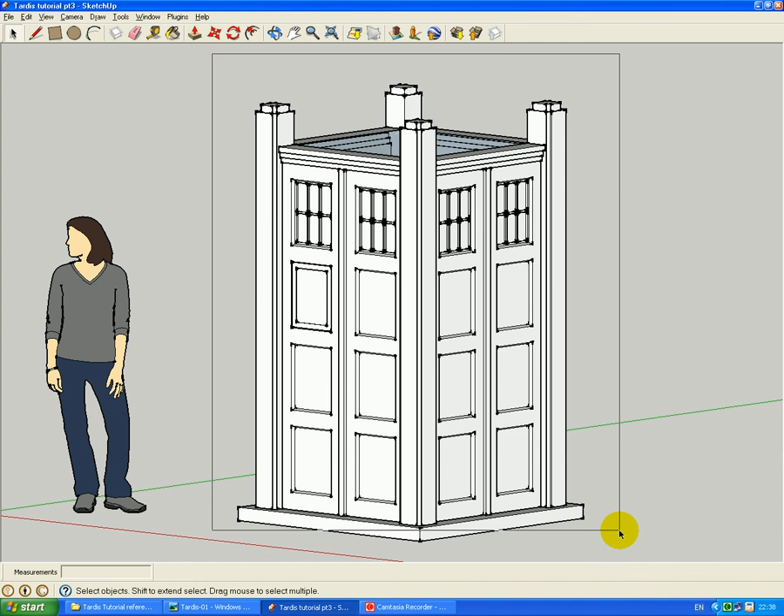So first of all, we're going to start out by hiding the columns and the side panels, because we're going to be using the base as a reference for centering our police public call box signs and the actual roof. So if we select all those, leaving the base unselected, and go to hide, that's hidden all those.

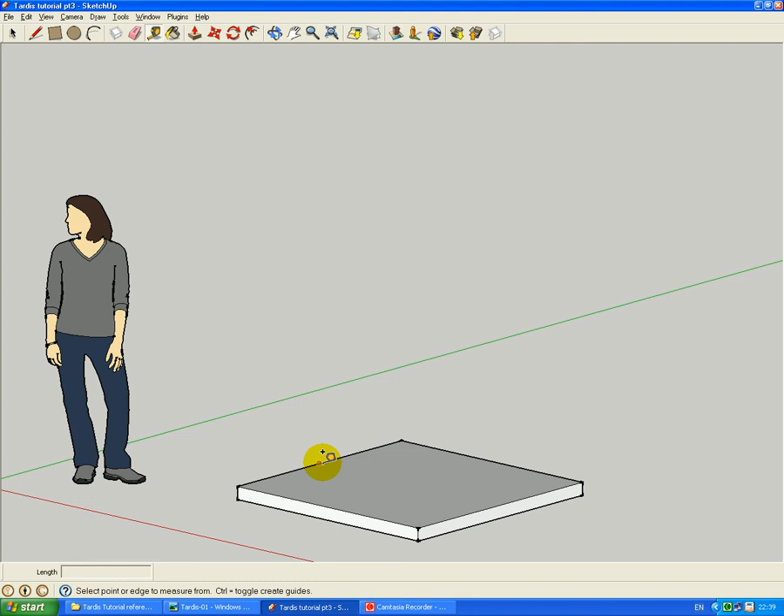If we angle this to get a better view, we're going to start by creating some guides. We'll start by making some guides that match the center. So if you reference this, that's the midpoint there, I believe. Yep, and that's where the guide wants to be, and the same for this guide here. Again, midpoint, there we go.

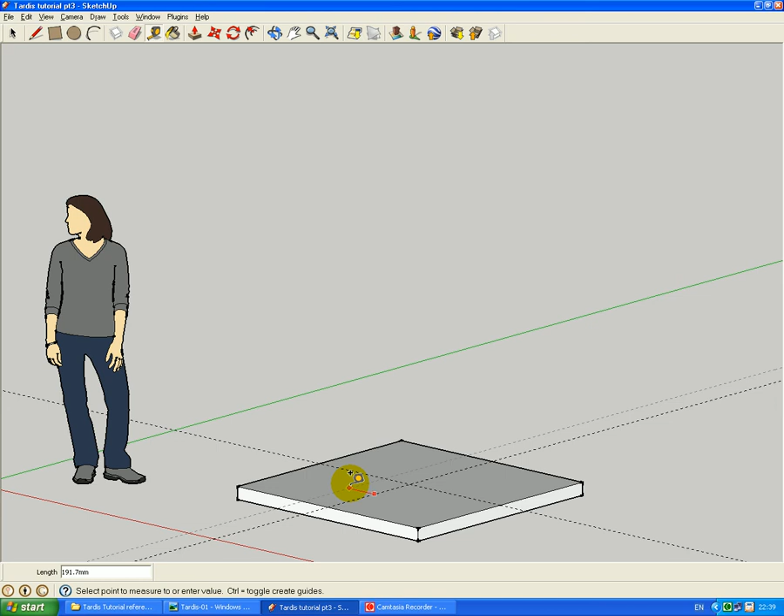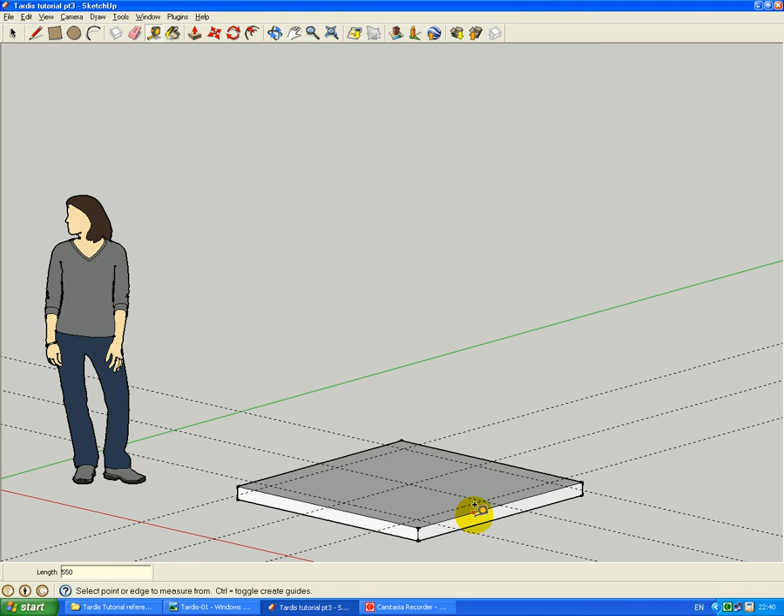The width of the actual police box, public call box signs is 1100, so we'll make some guides. 550 this way, 550 this way, 550 this way, and 550 that way. The actual width of the police public call box signs is approximately the same width as the base, so we'll create the cross section which will include the police sign and the roof shapes.

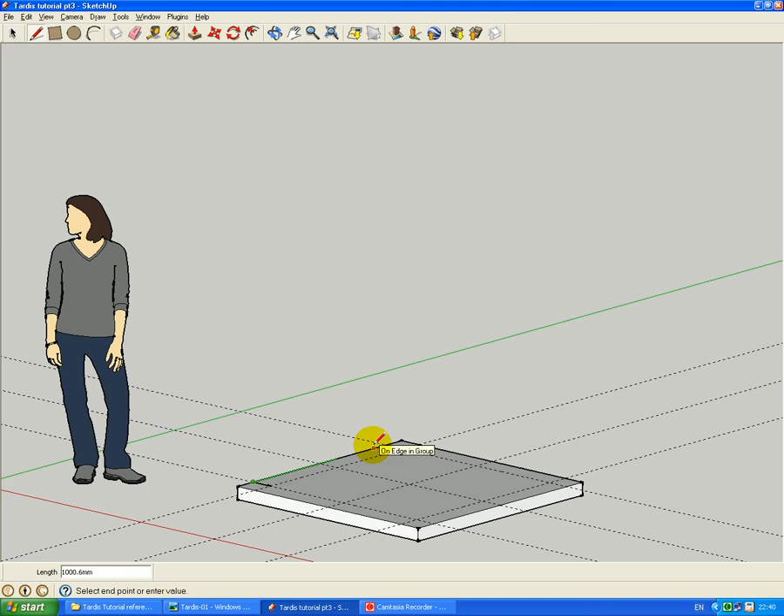So start by getting the pencil tool, start at any one of these intersections, draw from here to there, from there to there, there to here, there to there, there to there, to here, to here, to here, to here, to here, to here, and then finally join the two lines together, and that's created a cross section of our police public call box sign and roof area.

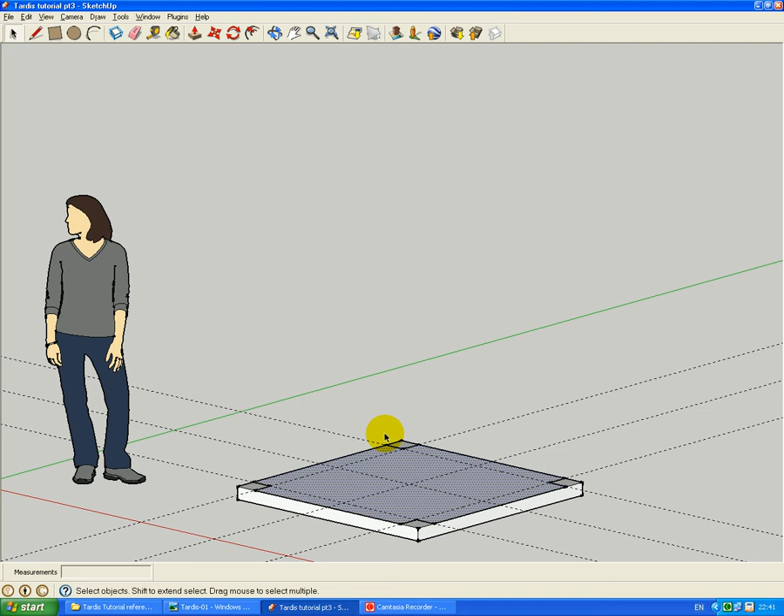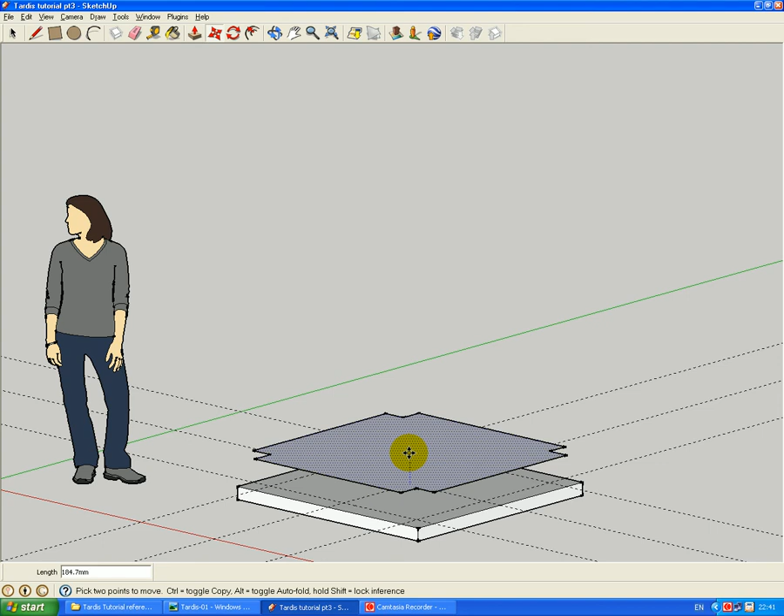We now need to lift this up into position, so if we select the move tool, we can sort of start the move from the center and start to pull it upwards. You can see there is a blue line forming just below the cross, where I'm moving it from. That means it's moving directly vertical, and we need to move it up to the same height as the side panels were, which was 2070. And this is where our police public call box signs and our roof will start.

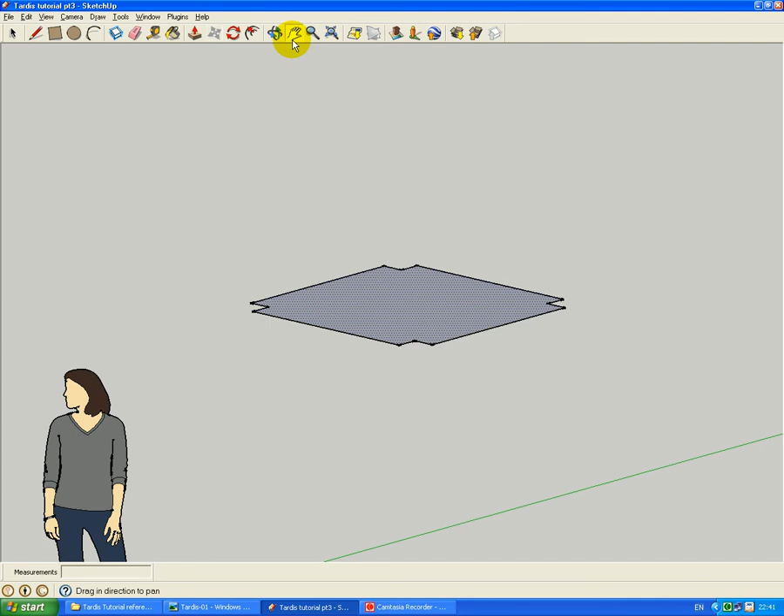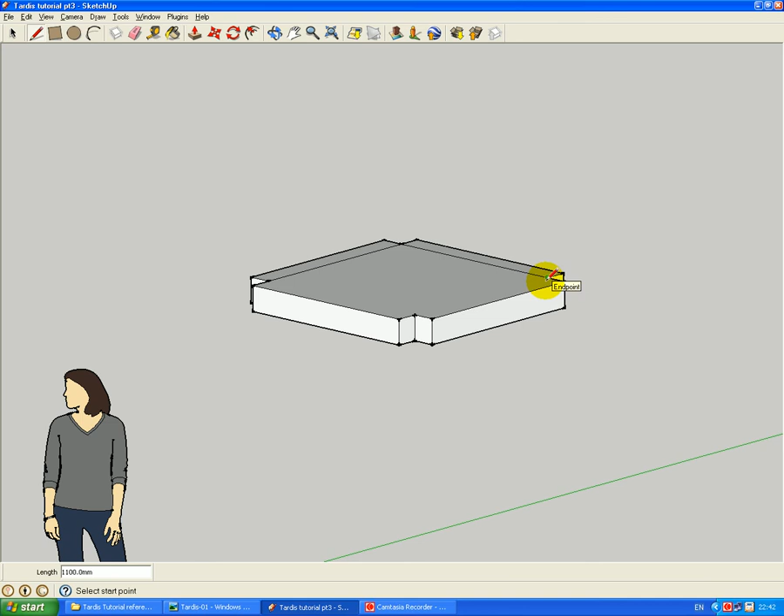We've finished with the guides now, so we may as well delete the guides and pan down so we can get at the roof section. First of all, we need to pull up this cross section to the height of the door sign, which is 152. We then need to put some additional detail in for the actual roof section. So if we draw a line from this corner to here, and from this corner to here, from this corner to here, and from this corner to here.

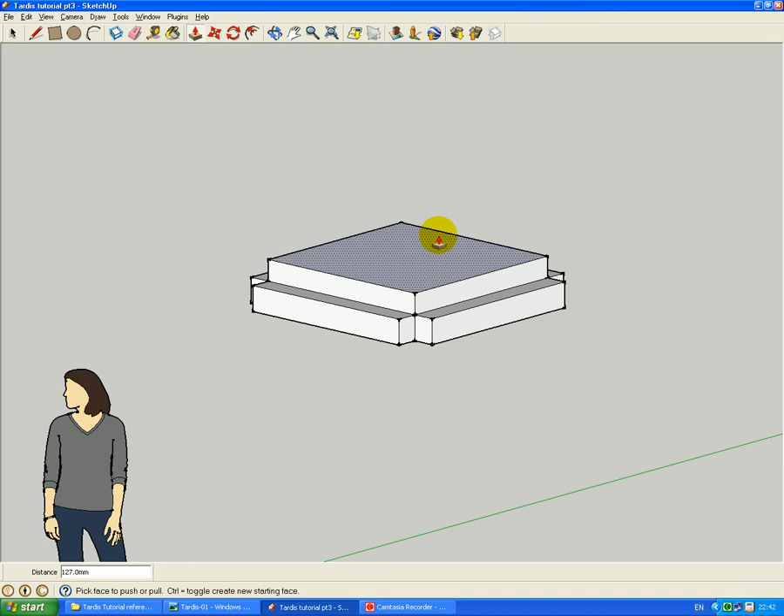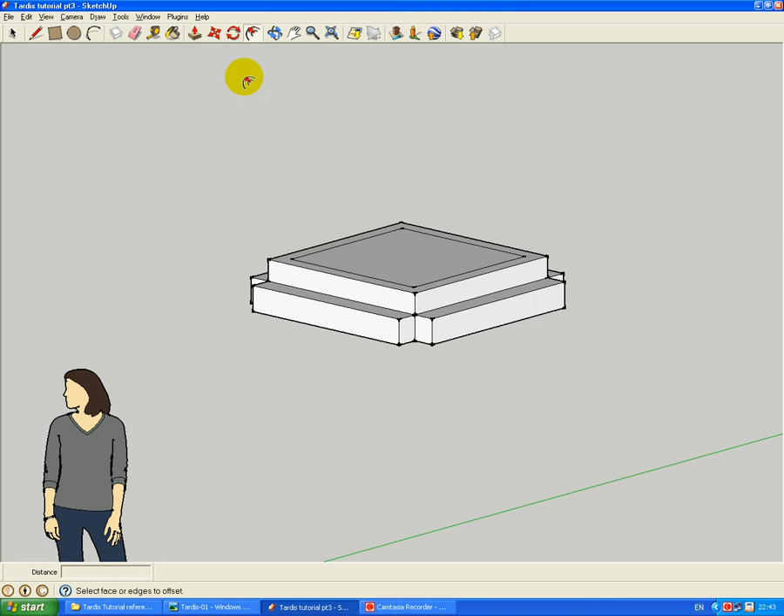We now need to pull up this section, 127. And we're now going to make the next step in for the roof, which is 1010 to 920, that's 90. We need to make it offset, and offset it in by 90. Which, if a quick measure, should make it 920, which is correct. Okay. Now I need to pull this section up 64.

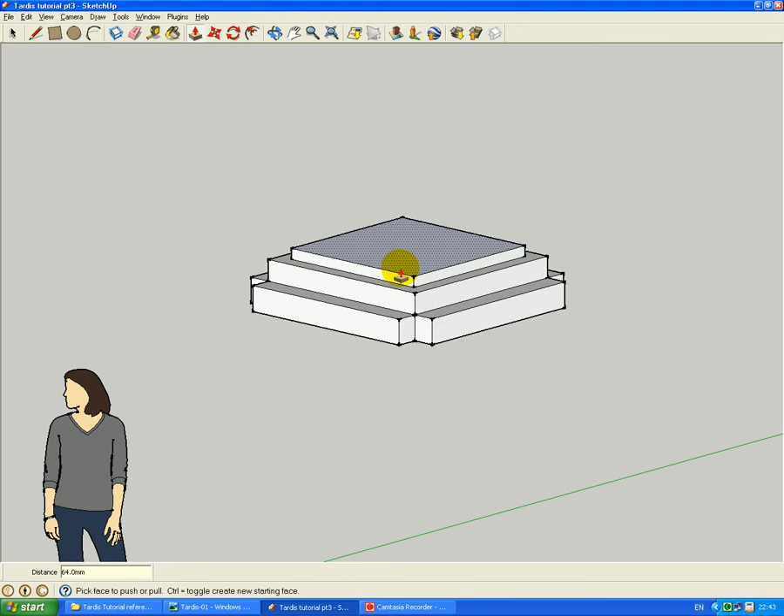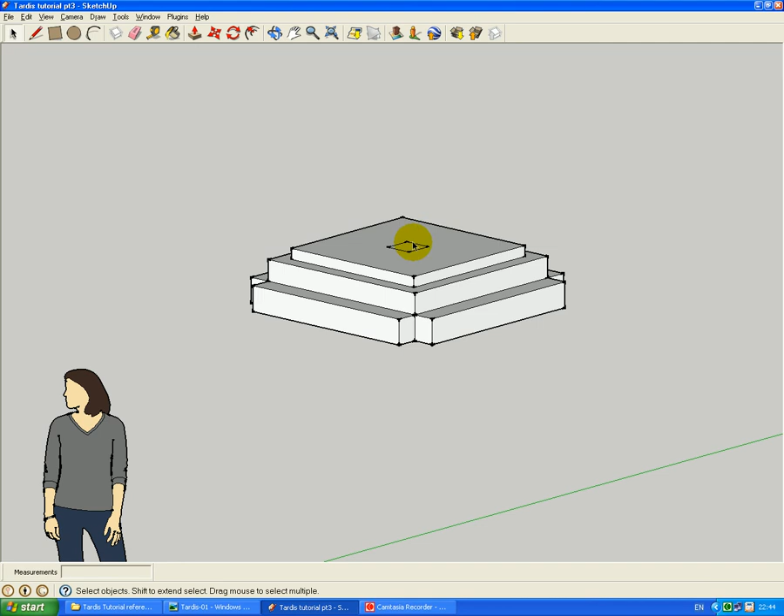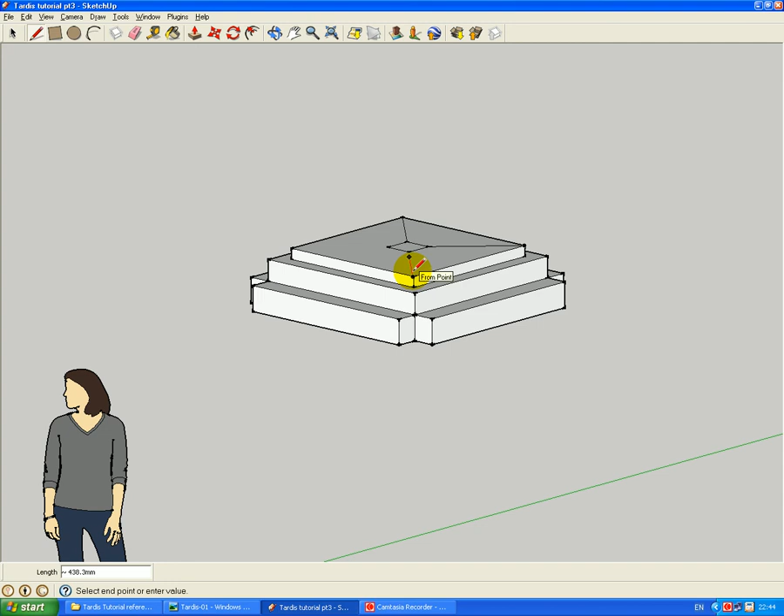I now need to make an offset on the inside, which is going to be 380. This shape here is going to be our centerpiece where the lamp sits on at the top, but first of all we need to pull the roof up to it to make its angled roof. We can't do that at the moment because we haven't got these edges that go from the corner of here to the corner there. So we get the pen tool and draw from here to here, from there to there, I've missed that point there, from here to here, and from there to there.

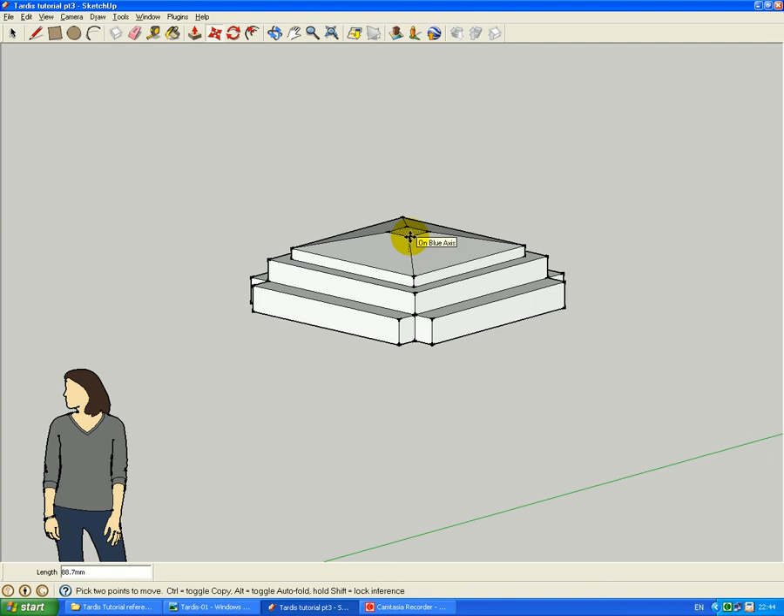Select this middle square, get to the move tool, start to move it up vertically, and we want to move it up 64. Just to make sure that it hasn't wandered off centre, let's just angle the roof round a little bit. As you can see, it's still perfectly central, that's fine. We now need to use the push-pull tool to pull up the centre, and again that needs to be pulled up 64. And that gives us our basic roof shape.

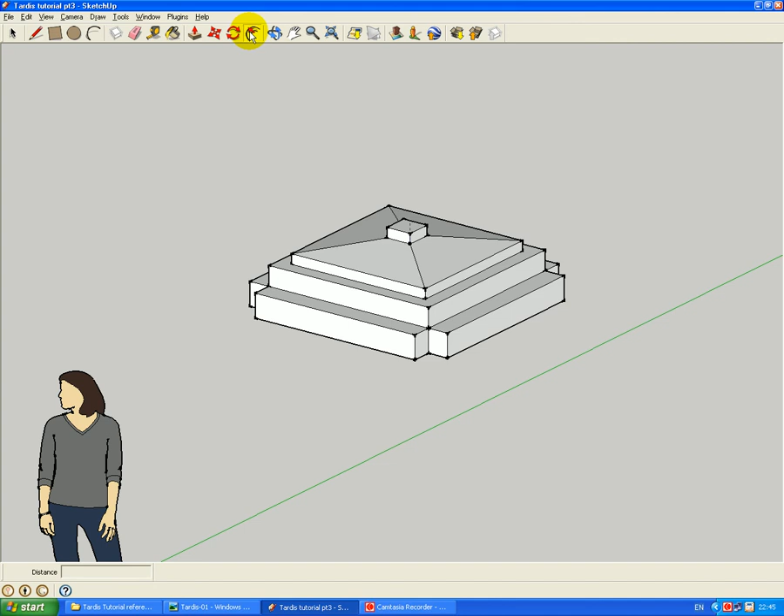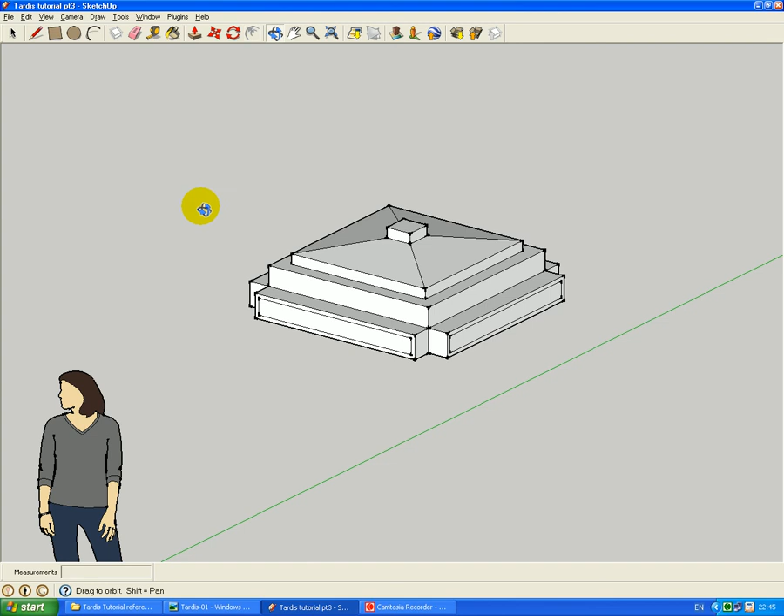We now need to make the recesses where the police public call box sign goes. So again we choose the offset tool and offset it by 25. And the same on this side, 25. Rotate it around and offset on this side as well, 25, and same here, 25.

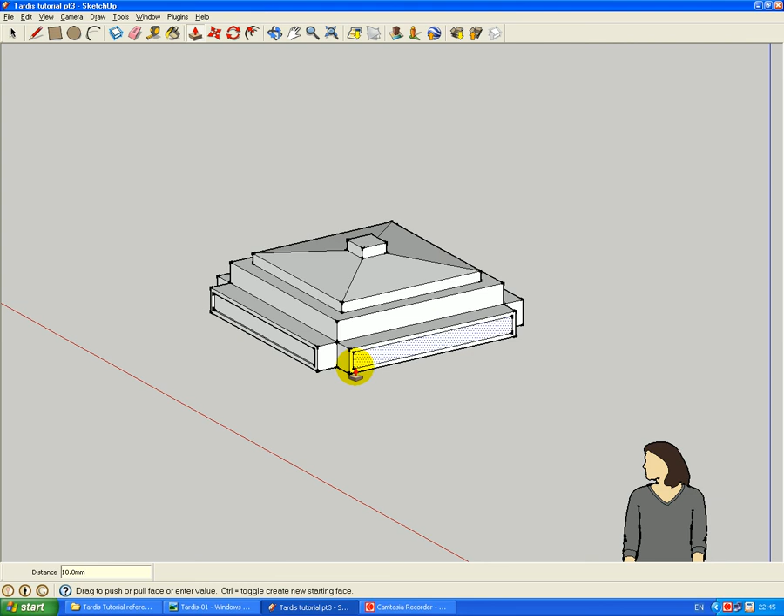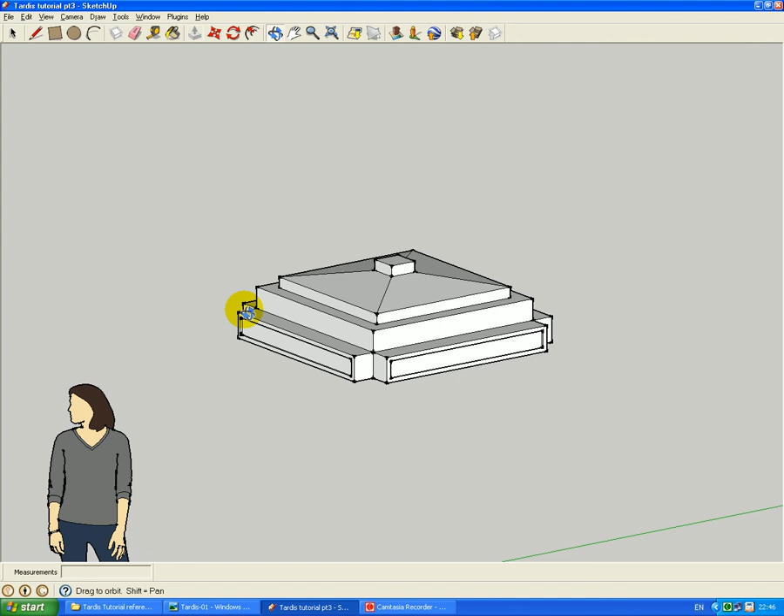Now to take our push-pull tool to make the recesses for the signs. So if you start to push-pull that in, push it in 10, push this in 10, rotate it around to get to the other two sides, and go to the push-pull tool again, push it in 10, and push it in 10. That's our basic roof shape and sign shape.

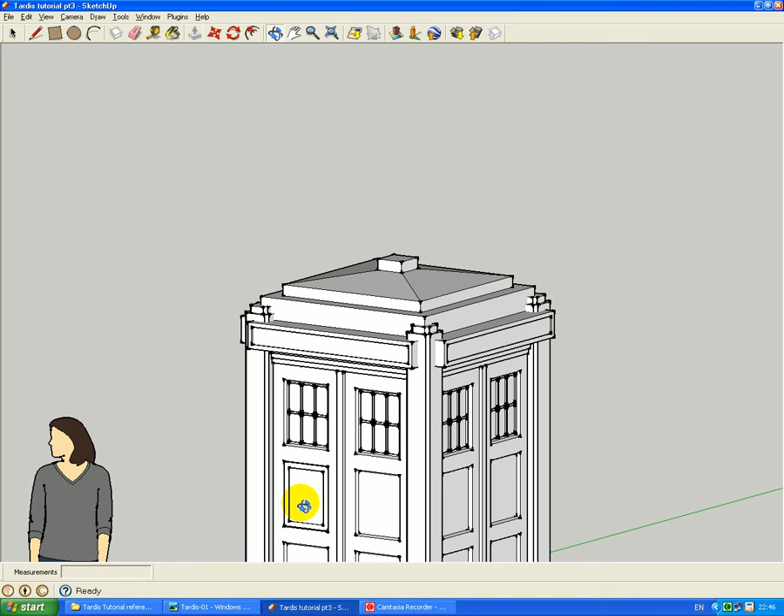If we now go and unhide the rest of the Tardis that we've previously hidden, edit, unhide all, we can see our Tardis is now coming together quite nicely. We've got the roof, the door sign, the police public call box signs, the telephone door sign, etc., and all the windows. If we just zoom out a little bit, pan up a bit, zoom in a little bit, pan it over, we can see using this sort of figure here, it is looking about the right size.

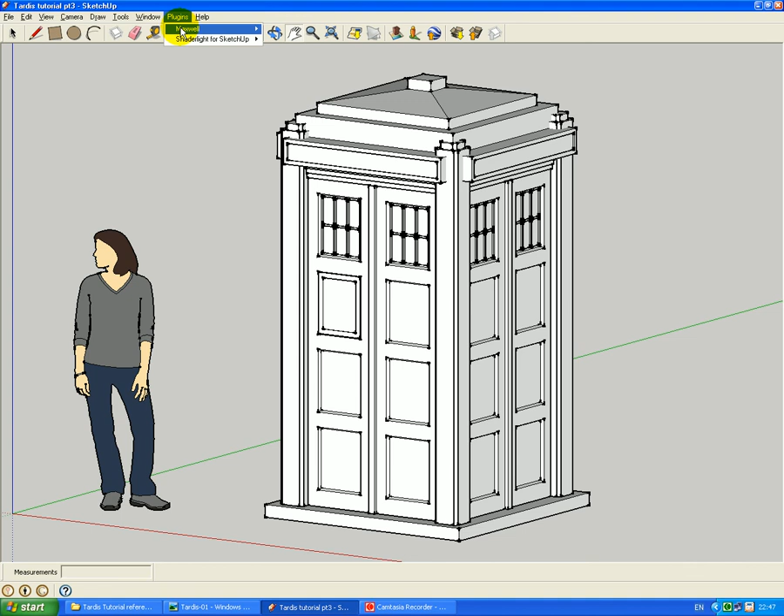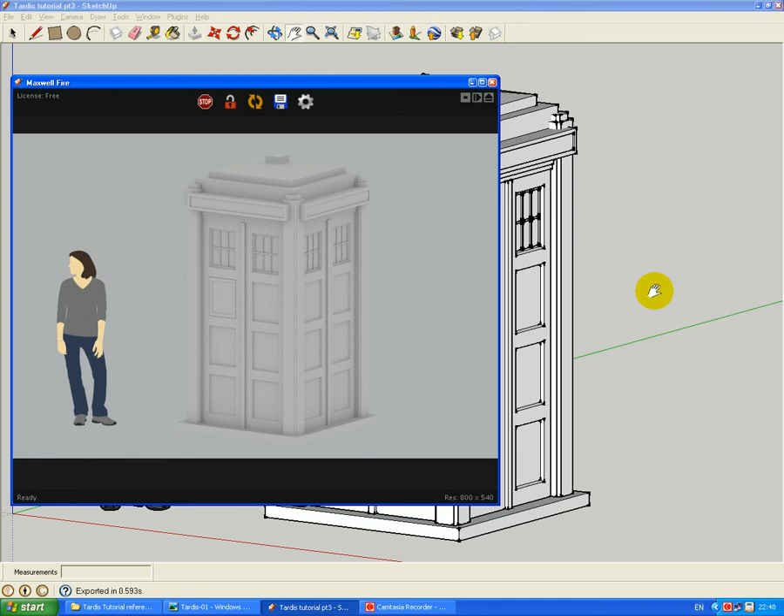The lamp will come in part 5, so we'll leave this tutorial there for now, and we'll see you in part 5 when we'll create the lamp.